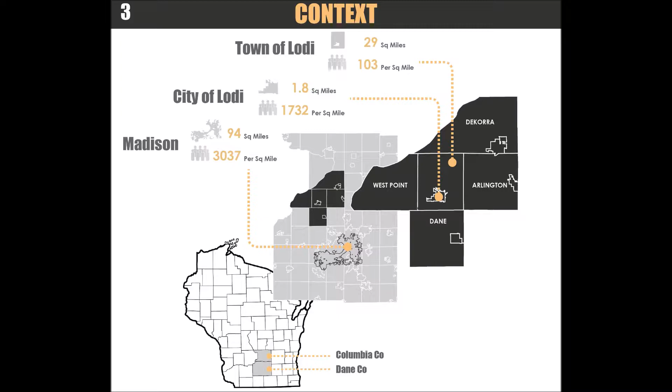Now let's look at my project area. My two project sites are located in Columbia County, north of Dane County. The Spring Creek Parkway is located in City of Lodi, while the Wildenberg Park is located in the Harmony Grove community in Town of Lodi. The two project sites are 5 miles away from each other, about 10 minutes drive. Regionally, the two sites belong to the same water system, the Lake Wisconsin watershed.

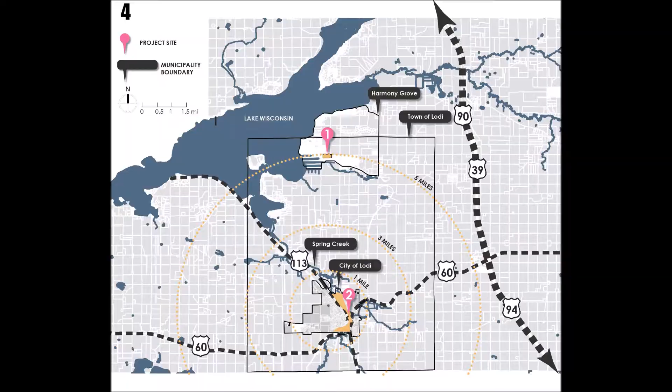City of Lodi and Town of Lodi were founded in pretty much the same time period, and their development was closely related to water. Downtown City of Lodi, the main street, was developed adjacent to the Spring Creek. Also, Harmony Grove community, the second largest community in Town of Lodi, was developed near Lake Wisconsin.

I first conducted regional analysis on Columbia County and Lake Wisconsin watershed. Firstly, I looked at population data and found that there is an increasing poverty and decreasing workforce participation, which indicates the need of promoting tourism and adding new business opportunities.

For the social aspect, the public health ranking of Columbia County is number 35, compared with Dane County, which ranked number 11th. Main public concern in Columbia County is physical inactivity, which shows the need to increase outdoor exercise opportunities.

Finally, in ecological aspect, main water quality concerns in the region include sediment accumulation, phosphorus loading, and groundwater contamination, which are all related to stormwater runoff. Ways to improve water quality include incorporating green infrastructure and maintaining riparian areas. Another issue in City of Lodi is the frequent flooding issue, which needs to be addressed throughout the design process as well.

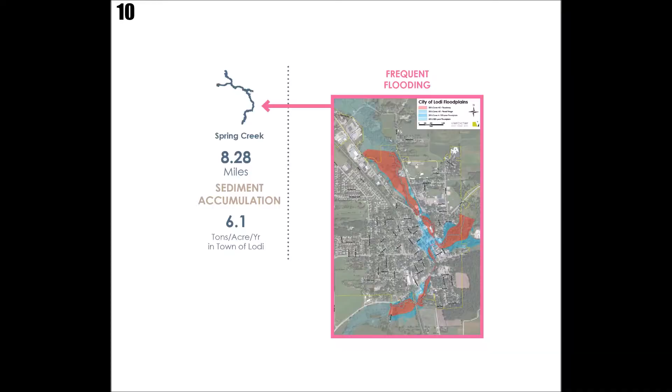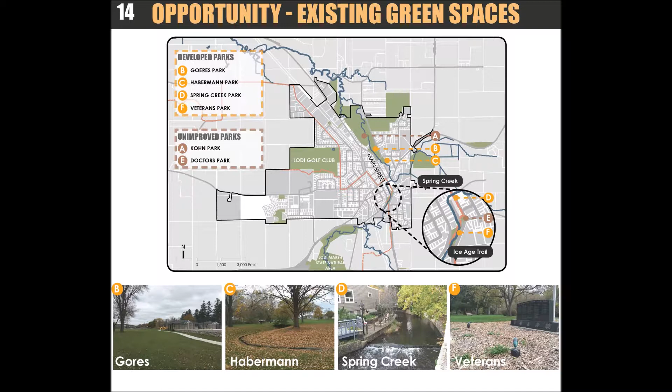Also, rich visitor attractions, historic events, and art events are also great opportunities to draw visitors, such as Agricultural Fair, Susie the Duck Day, and Friday Out Walk. These events could be integrated into the park design.

In terms of the constraint, biggest one is the lack of accessibility to the creek and difficulties to navigate between different parks. Existing problematic conditions along Spring Creek include disconnected paths, blocked views, private parcels, ADA inaccessibility, and narrow sidewalks.

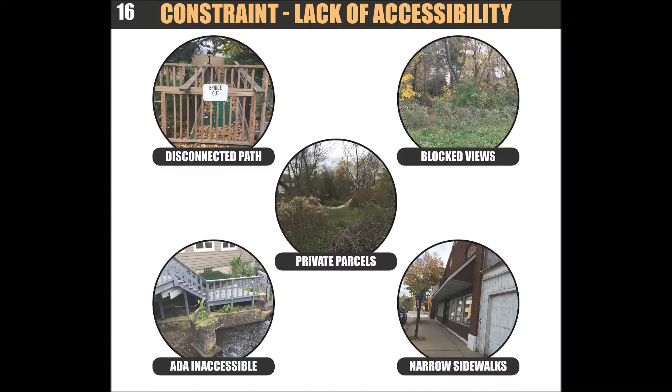Another constraint is the lack of community awareness and connection, especially between the young people and the creek. In this map, darker color indicates high youth density, so the map shows that young people and schools are disconnected from the Spring Creek. Therefore, educational nodes should be added near the creek to draw the youth to the parkway and park system.

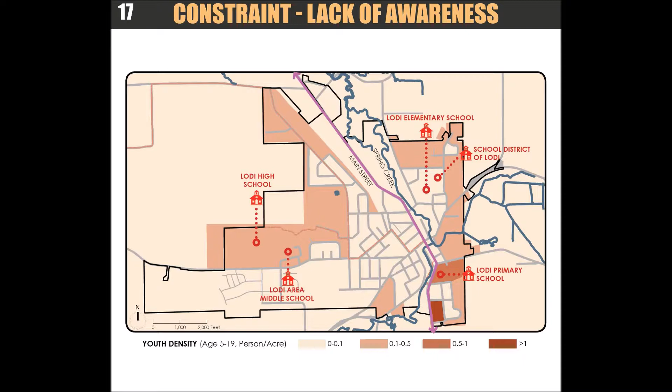I also identify Harmony Grove's opportunities and constraints. The biggest one is the opportunity to restore oak savanna and sand prairie habitat. However, throughout the design process, we also need to protect the endangered wildlife species, especially slender glass lizard.

Finally, I look at specific site conditions. I broke up my site into 4 different zones, and I will talk about my focus site, Zone 2, and Wildenberg Park in detail.

For Zone 2, the parkway that goes through downtown City of Lodi, there is about 43% of commercial land use and 27% of residential land use. And there are connection gaps that need to be connected to link residential areas to business areas.

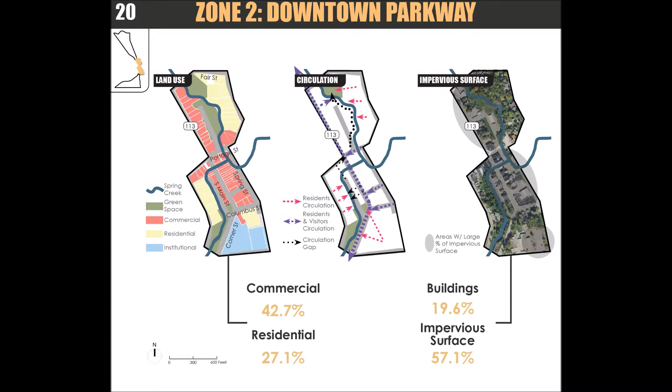Since it is the most developed area, there is 19.6% roof area and 57% impervious surface, which means that stormwater management would be very important to minimize impact on Spring Creek.

The first concern area in Zone 2 is the only privately owned parcel near the creek, with 2 existing mini warehouses which now block access to the creek.

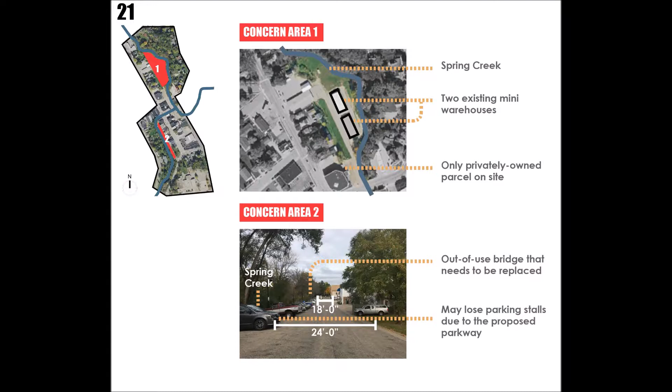Another concern area is the parking lot behind the business buildings on Main Street. Adding a parkway may lose parking stalls here, which is not favorable to residents.

Throughout the whole parkway system, I found unpleasing alleyways which need to be improved later. Also, I will try to keep characteristic materials such as stone and steel to keep the traditional style with a twist, according to residents' preferences.

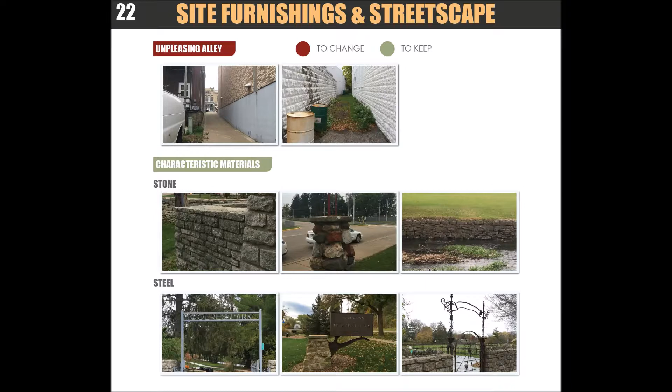Lastly is the analysis for Wildenberg Park. There was existing junk on site, a missing trail loop to be connected, and vegetation in bad condition. Its slope decreases toward Lake Wisconsin, making reducing water runoff and contamination a challenge.

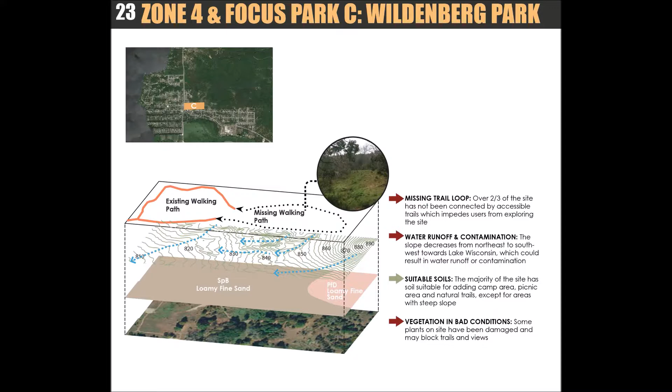The comprehensive analysis helped me reaffirm my design goals. I will focus on promoting social interactions, environmental education, downtown business development, and local public art.

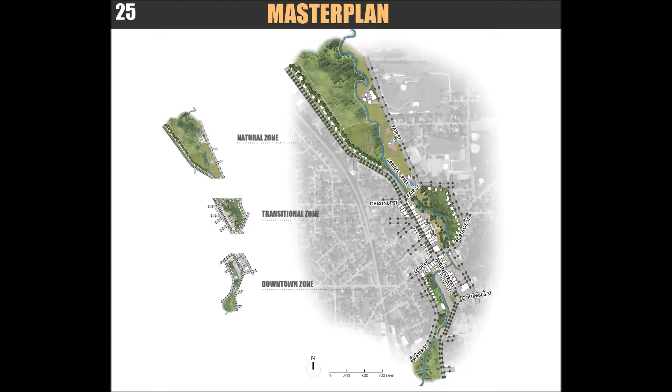Guided by my design goals and design strategies, I finally came up with this master plan. I divided my master plan into 3 zones: downtown, transitional, and natural zone. Before I talk about each zone, I want to talk about the different layers of my master plan.

As for land use, I increased the percentage of commercial and especially mixed-use land use, while keeping most of the existing single and multifamily residential areas. This will promote local business and keep a separate but still interactive relationship between commercial and residential zones.

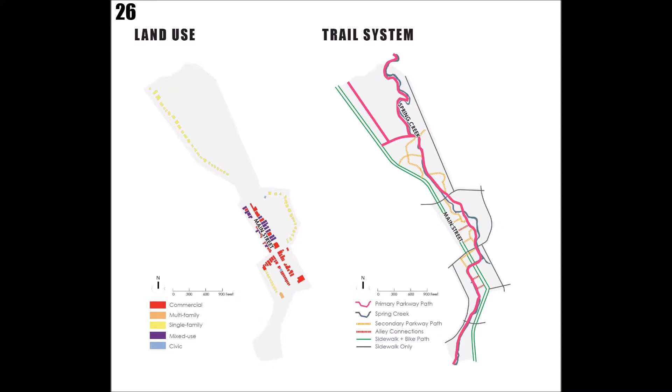As for the trail system, in addition to the main parkway along Spring Creek, I also propose to include secondary trails in green spaces and alleyway connections. Bike paths will be added to the main street. This will increase the overall accessibility throughout the parkway system.

There will be different levels of green spaces as well, including natural planting areas, parks, stormwater planters, or green roof.

For vehicle circulation, I rearranged the locations of parking lots and propose to extend the street parking from Main Street to other roads to ensure sufficient parking stalls.

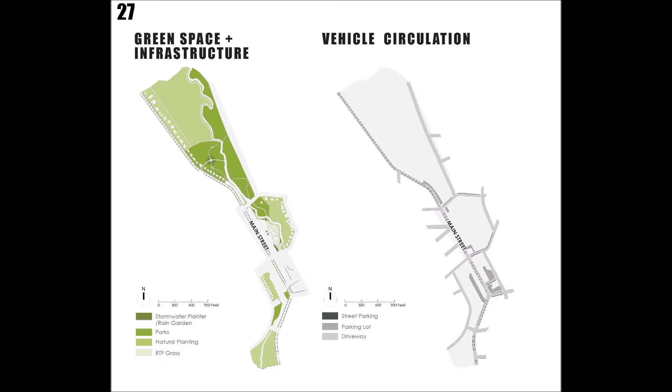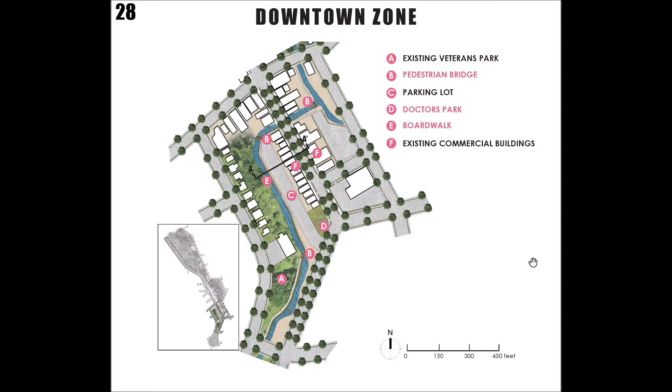Then let's look at each zone closely. This is the downtown Lodi zone. Main design elements include pedestrian bridges that replace the out-of-use ones, Doctors Park, the urban gateway park, and boardwalk system.

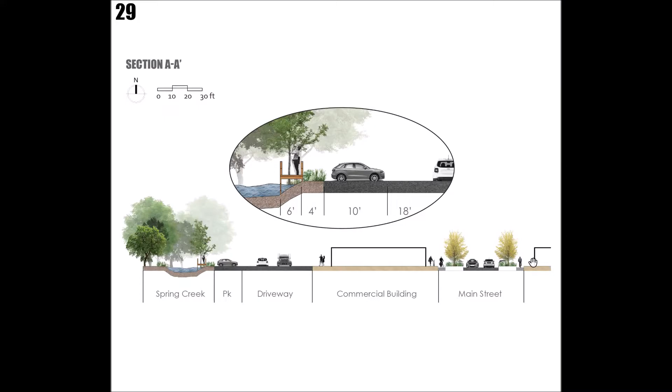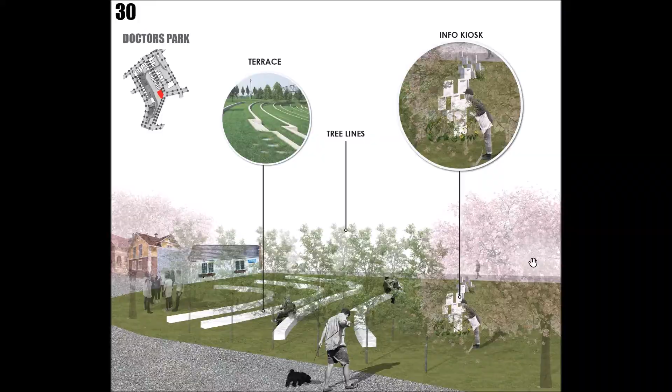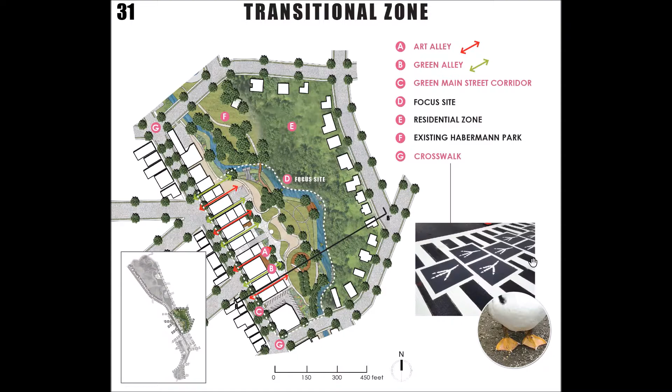As I mentioned earlier, unpleasing alleyways prevent people from exploring Spring Creek. Therefore, the art alleys allow local artists to show off their artwork on the building walls while attracting more visitors. Similarly, planting vines on building walls greens the alleyways and attracts users as well.

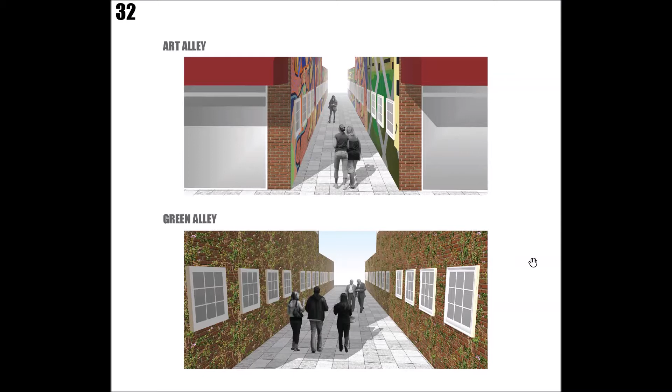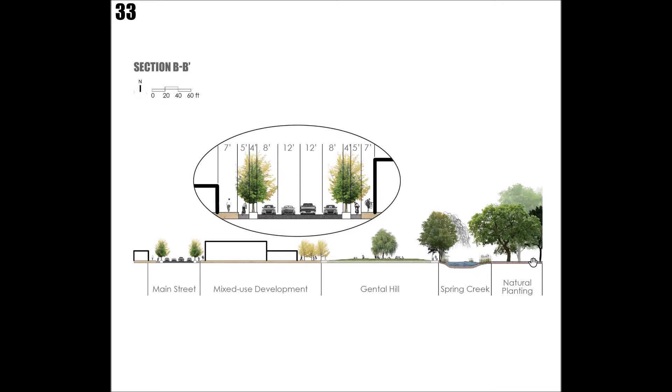This section BB focuses on showing the Main Street green corridor. I propose to add bike lanes and tree lines along Main Street while keeping the street parking and making sure there are sufficient rooms for the main traffic.

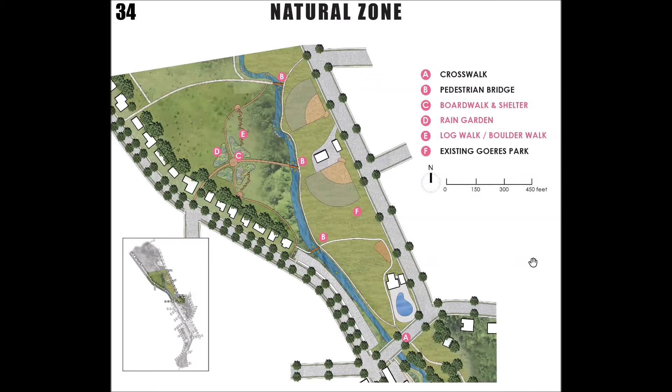Finally, the main design elements in the natural zone, or Kohn Park, include the boardwalk and shelter system, rain garden, and log walk.

This rendering shows that the natural prairie planting will be kept undisturbed. Together with the added rain garden, the plants will be great environmental education opportunities for the youth. The shelter could be turned into a green shelter as well, with plants on top of the shelter.

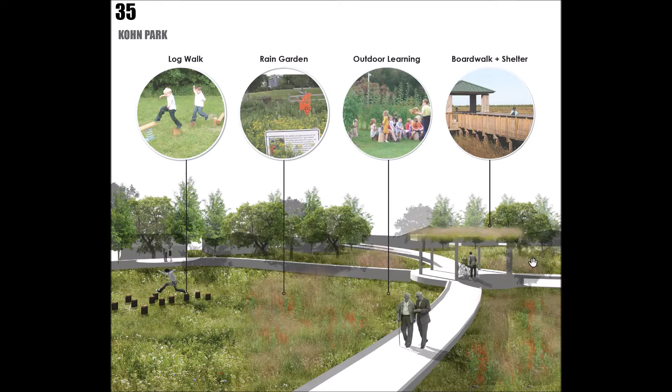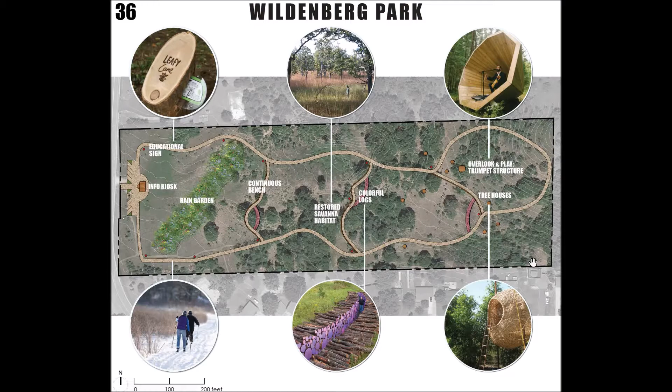To increase outdoor exercise opportunities, the dead tree trunk can be reused and turned into colorful logs that people can climb on. To encourage people to explore the whole site, interesting tree houses or overlook structures can be incorporated near the top of the hill.

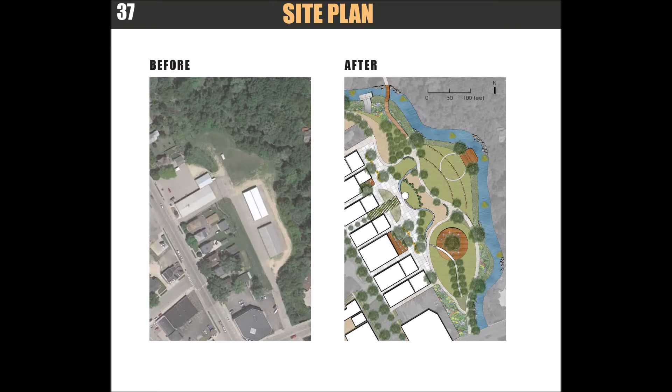Zooming to my site, which was previously 2 mini warehouses located in the transitional zone, the space is turned into a public area behind the proposed mixed-use and commercial buildings.

My design concept is threading. The parkway connects the area in different directions. As you can see, the main parkway has a curved shape that mimics the shape of Spring Creek, and there are also straight alleyways and central access.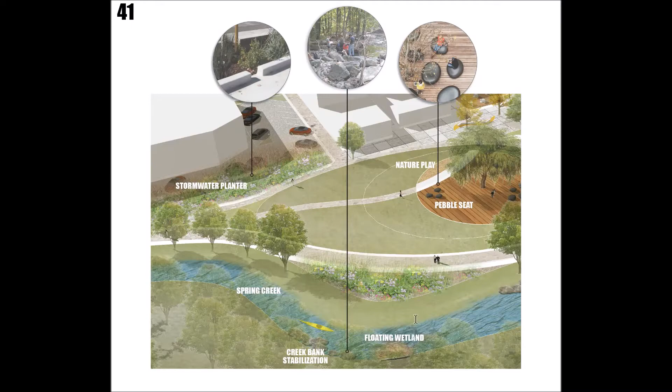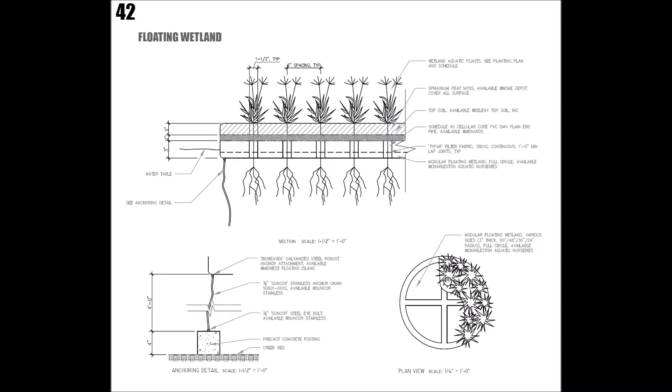The construction detail focuses on lowering the cost of these floating wetlands by using the modular floating wetland system. It will be easy to install as well, so the wetlands can be applied to the whole creek system.

I also propose an interactive water feature which has a similar form to Spring Creek, which re-emphasizes the importance of the creek. People can sit, walk, and cross it. The benches on site will be lighted in the evening.

As mentioned, rocks can not only help stabilize the creek bank, but also create better habitat with the floating wetlands. The open terrace can be a place for public events such as mini concerts, group yoga, July the 4th firework events, and so on.

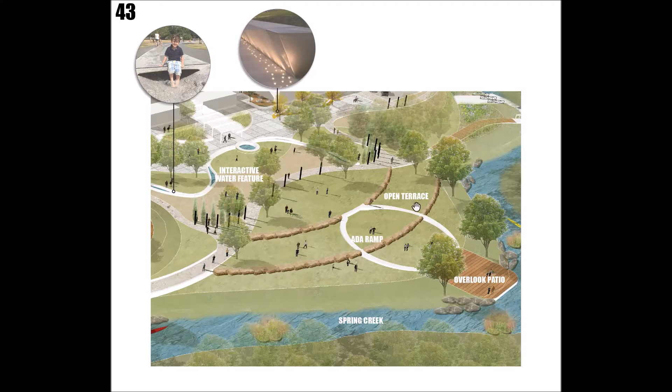The design of the open terrace is consistent with an existing design in Veterans Park that used limestone as the terrace edge.

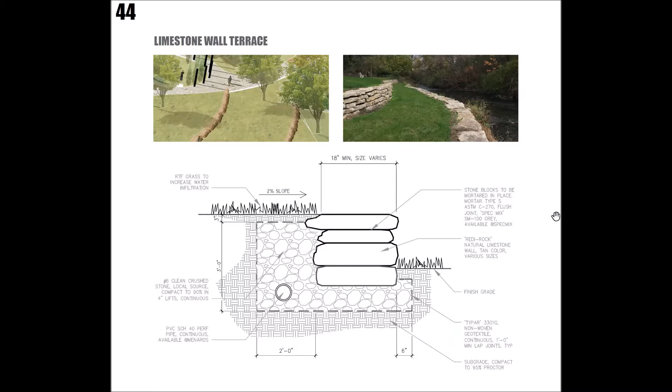The lights on my site can help extend the hours of the area. When people from the mixed-use buildings finish working, they will be able to enjoy a night park.

The kayak dock is for kayaking, and the form of this pedestrian bridge is also mimicking the shape of Spring Creek.

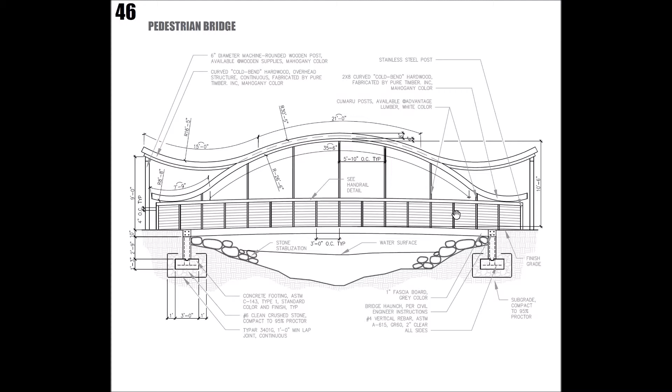The construction detail helps illustrate the form of the pedestrian bridge. Even the railing system has that curved form, and there will be LED lights under the handrail to also help light the space.

My site includes 3 levels: water, buffer zone, and public space, so my plans include 3 parts as well: aquatic, riparian, and upland. My plant selection for all 3 parts is based on 6 considerations: mostly native, non-invasive, not overly planted, seasonal interests, various colors and textures, high to medium flooding tolerance, and low maintenance.

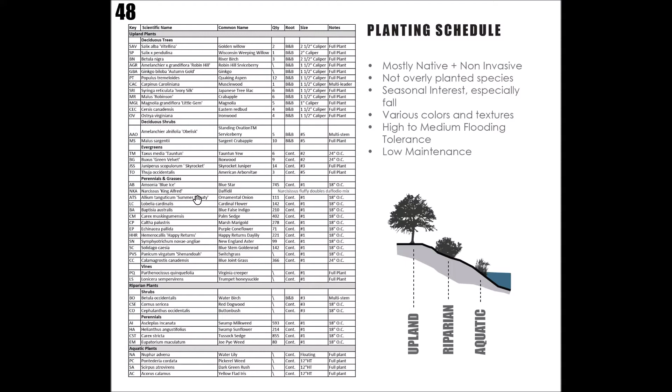Here is the color palette for the plants, creating seasonal vibrance, and here's the location of stormwater planters and the plants that will be used.

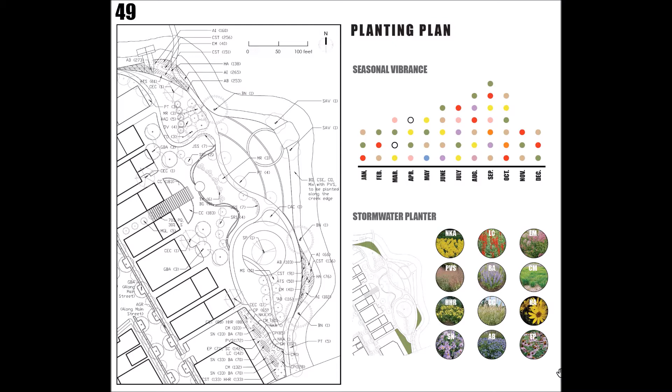Finally, I also did a grading and drainage plan for my site. The most challenging part is to ensure that most areas are above the flooding elevation of 812 feet and to prevent most of the stormwater flowing into the creek directly.

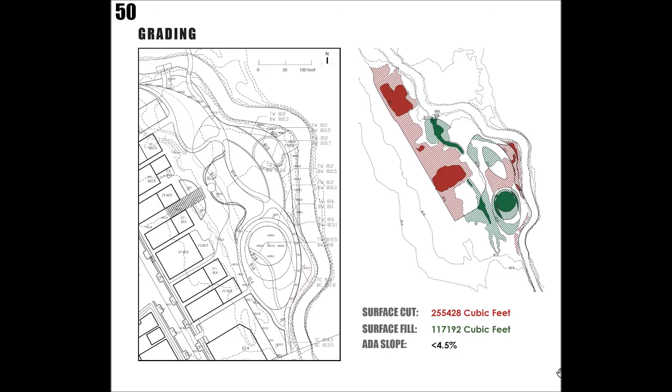I also ensure ADA accessibility through the grading plan. I collect water for reuse through drains and subsurface cisterns, as you can see here.

This calculation sheet shows that I am able to reduce stormwater runoff through changing surface materials by about 8 cubic feet per second. I am also able to make the total cut over fill, so there will be no need to purchase any more soils during construction.

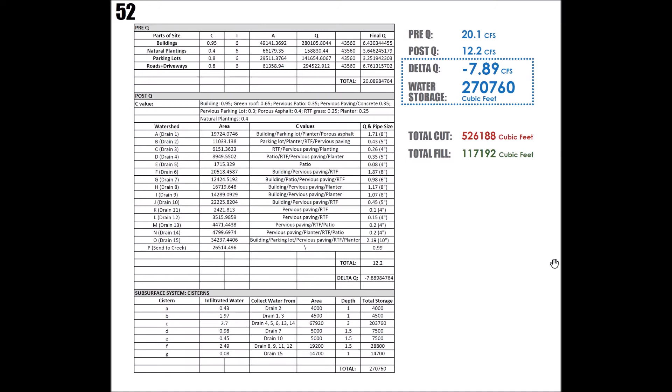To evaluate my design, I set up quantitative metrics last semester to help measure my success, and these are all achieved through the design proposal I just presented.

In conclusion, my expected results of this project are to bring economic, cultural, environmental, and social benefits to Lodi, increase connectivity and accessibility, create a sense of belonging, facilitate commercial and mixed-use development, promote local art, improve the creek ecosystem, and improve public awareness of Spring Creek.

Ultimately, I hope this project can serve as a precedent for future protection of the creek and expansion of the Spring Creek Park system. That's all I have in this presentation.